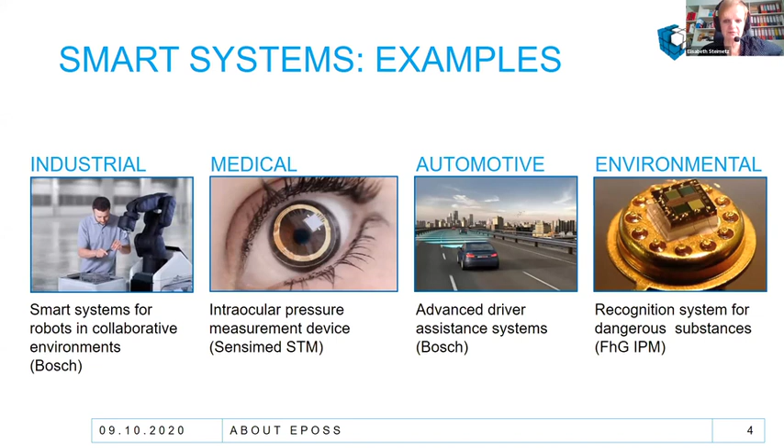I don't think I have to talk about what a smart system is, just to show you some typical examples of EPoSS members here on this slide, coming from industry, industrial applications, medical, automotive, and environment. What's maybe more interesting is what EPoSS can bring to it, and what we are doing there. We try to really connect experts and create common European approaches for research, and from research to production.

Based on that, we are defining research priorities. We are very active in creating roadmaps and SRAs. This year, EPoSS is heading the ECS SRA, the Electronic Components and Systems roadmap. We are involved in the roadmaps of other public-private partnerships for upcoming new Horizon programs like CCAM, like Towards Zero. My colleague Gereon will talk about that in detail a bit later. So we are defining strategic innovation processes and roadmaps, and last but not least, we try to mobilize public and private financial resources to do all this.

Currently, we are involved in Horizon Europe. Of course, we have published papers to position SMEs in this context. We are now integrating with Euripides, the Euripides community, into EPoSS for upcoming Eureka programs, and we are deeply involved in the ECSEL joint undertaking. So the succeeding program will be the Key Digital Technologies public-private partnership, which is currently under preparation and will hopefully start towards the end of 2021.

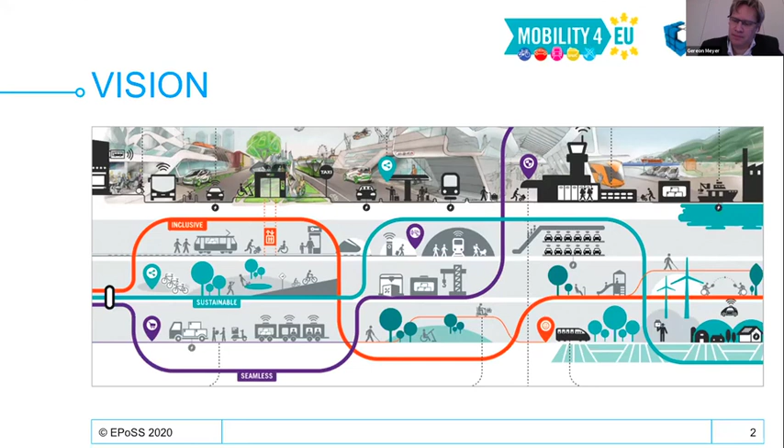In the EPoSS community, we have recognized that smart systems enable the transformation of the mobility system. We've had this vision for a long time, because they are key to enabling green, integrated, interoperable mobility solutions. They facilitate taking into account the human in the approaches, and they support the transformation of transportation as a whole, with technology transfer from auto into other domains.

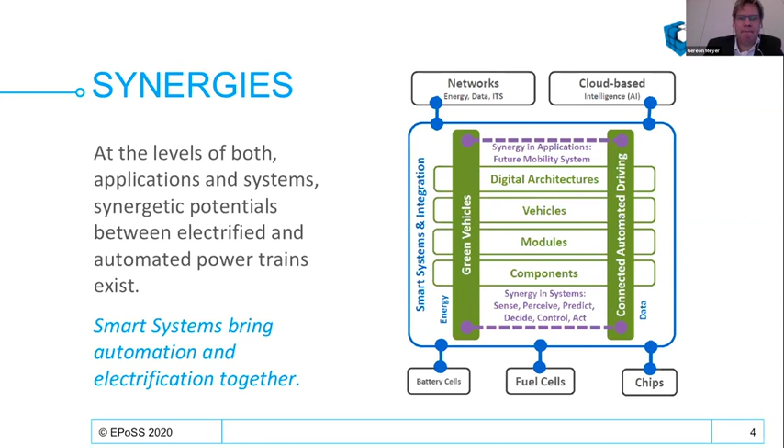Automated driving is a very good example of the role of smart systems as an enabling technology, and also as an enabling technology that can support a paradigm shift. Originally we developed that topic out of advanced driver assistance systems, assuming there are more and more functions that vehicle systems can perceive based on sensing and sensor data fusion. At the latest stage, a driver can, for a short time, take hands off the wheel and eyes off the road, and have the vehicle drive for a while until it comes to a point where it needs human support. But the interesting step is, of course, if you take the driver completely out and make the system self-driving, driverless.

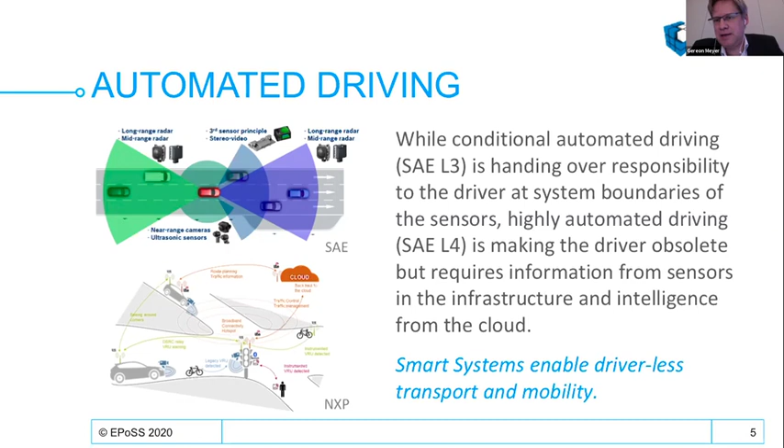For that, there's more than just what the capabilities of a smart system in the vehicle can deliver. It needs embedding into greater data availability and knowledge sets, and this is also the point where artificial intelligence comes in.

Just to show you one example that I find most striking: the situation on the road. You have a person close to a crosswalk and a super intelligent smart car approaching. The question here is not just what the car can perceive and detect, maybe a 3D image, but what this means and what expectation the car system has of that situation. The crucial question is whether that person will cross or will not, because in one case the car needs to stop, and in the other it can continue driving.

Of course, we want to avoid a car stopping all the time if there's just the slightest possibility of somebody maybe approaching the road. Rather, we try to be able to tell in a trustful way what will happen, to understand the intentions of the road user. Here, the capabilities of smart systems themselves are quite limited, and we need additional information. We need to understand patterns. We need to know and take into account a big set of experiences.

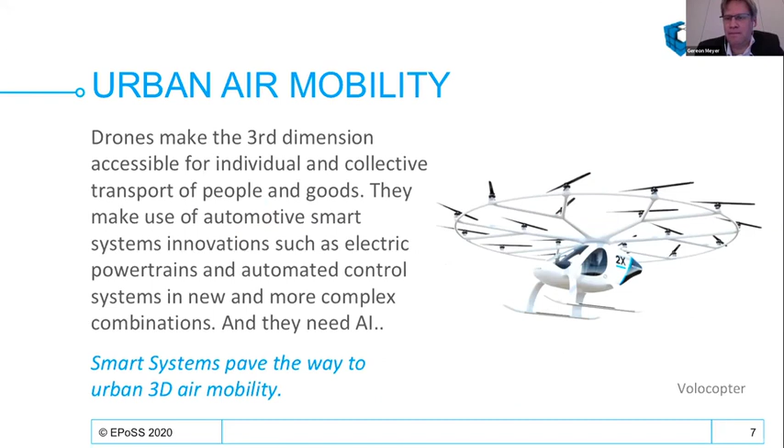Maybe that's also the role of the EPoSS community here: to point to these needs and show where the future directions are. This has been well reflected in a lot of roadmaps and documents published in recent years, whether on the electrification of road transport, on automated driving, but also in our strong support to the European Commission in drafting the Strategic Transport Research and Innovation Agenda, covering the electrification of the transport system, automation and connectivity.

One important aspect is that the EPoSS community and their members, in very few cases, are developing technology you can directly put on the road. We are part of an ecosystem of enablers, in interaction with an ecosystem of applications that needs to understand where the technology pushes are that we can define, and also what technology needs to be pulled according to user expectations from the application domain. That's a very exciting interaction, which the EPoSS community supports through the lighthousemobility.eu of the ECSEL joint undertaking.

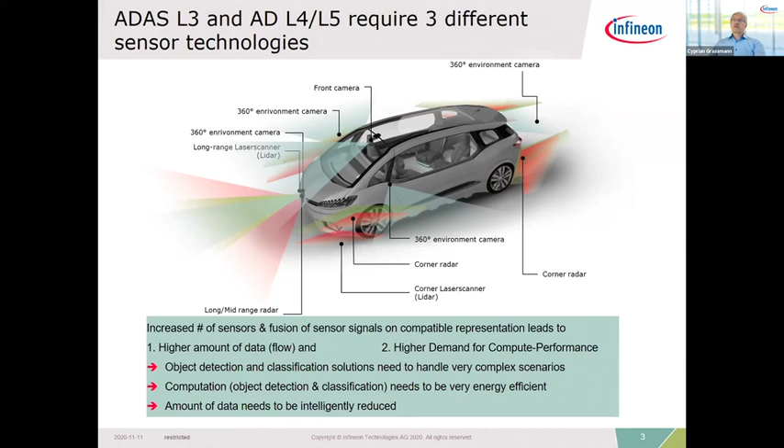And to bother you even more with numbers, I want to dig a little bit deeper now also into the radar aspect, and show you what that means. So if you look at today's radar sensor, which is a so-called FMCW system, frequency modulated continuous wave radar. Here showing a simple example in adaptive cruise control

sensor. When you look at the early versions, you basically have more or less a sensor which is processing all the stuff until the drive command. That means it gives you acceleration, deceleration commands out of the sensed situation, and the objects which are classified, if you have an obstacle or a preceding car which is slower and you have to slow down, or is accelerating and you can accelerate again.

So if we look at such a system, a radar sensor, we just pick a system which you would see deployed in cars today. We're talking about, let's say, a 3 transmitter channel and 4 receiver channel radar device. And when we look at the so-called MMIC, monolithic microwave integrated circuit, you see that with 4 receive channels, we will end up in a max of 400 megabit per second per channel, which ends up to be 1.6 gigabit per second data stream, which is coming out of that one sensor.

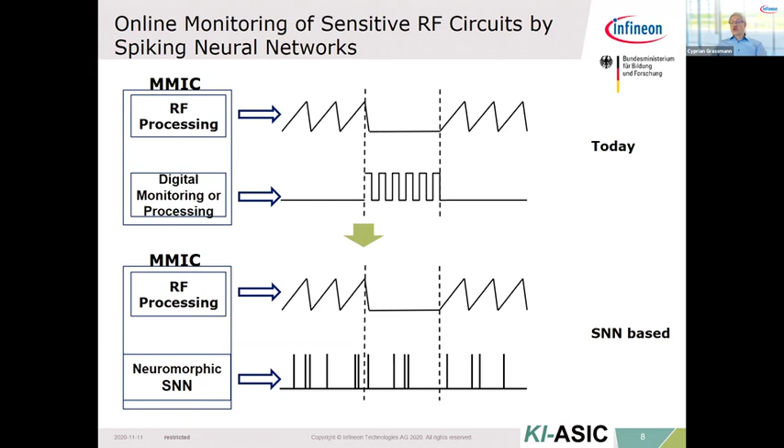Moreover, it's quite important to look at additional benefits which these networks can provide. I said they are asynchronously active, and they have a low activity. So especially radar is one of these solutions where you have sensitive RF circuits, which might be disturbed by this activity of monitoring, especially if you do this digitally. The very standard situation for sensitive circuits today is having digital activity in areas where you usually have no RF activities. With these spiking neural networks, you have the chance to run continuous monitoring of the device without disturbance, or much lower disturbance, leveraging all the benefits of these kinds of networks.

So as a conclusion, I hope I gave a lot of motivation that this AI is not only attractive, but also necessary to deal with these complex autonomous driving challenges, and that neuromorphic solutions, with their promise of lower power consumption and potential lower disturbance of these sensitive systems, are a path to cope with this problem.

We have mainly the challenges ahead. That means we have functional safety requirements to fulfill using artificial intelligence approaches, because this is rather tricky. But on the other hand, we also have the opportunity to use AI especially to fulfill the functional safety requirements, which somehow sounds like making the fox in charge of the hen house, but effectively is an opportunity which probably has to be looked at more closely.

And therefore, it's quite essential to invent SNN solutions for functionally safe AI, to be able to fulfill all these promises which we put out for autonomous driving.

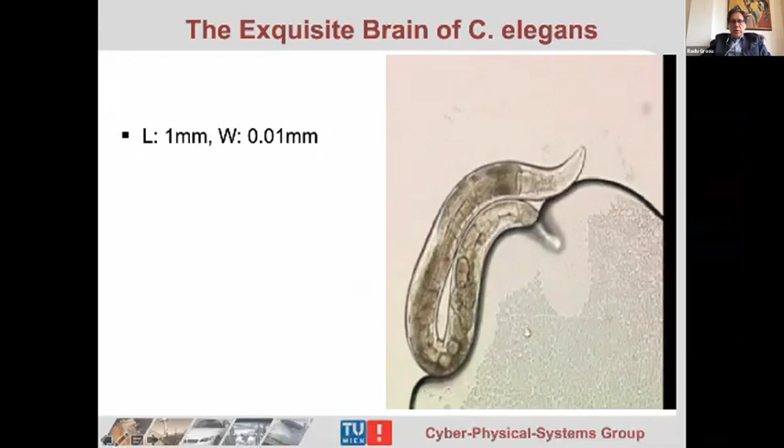Our inspiration comes from C. elegans, a very small worm, less than 1 millimeter in length and 0.01 millimeter in width. Being so small, its 302 neurons can communicate with each other without attenuation, without using spiking. We consider that spiking is a very important implementation issue, like analog to digital conversion. It's very important for implementation, but not from the point of view of learning.

The nematode has around 8,000 synapses and 95 actuators, which are the body wall muscles. Together, they allow amazing associative learning capabilities and social behavior capabilities for this small C. elegans nematode.

Like any cell in the body of every organism, a cell has a membrane, and the membrane is fat, so as a consequence it's an insulator. There is a concentration of ions outside the cell and a concentration of ions inside the cell, and the difference in concentration of these ions defines a membrane potential, V. For example, cell i has a membrane potential Vi. Since this is an insulator, it acts as a capacitor, so you can write the capacitor equation for the membrane of the neuron, where the rate of change of the membrane potential is the sum of its currents.

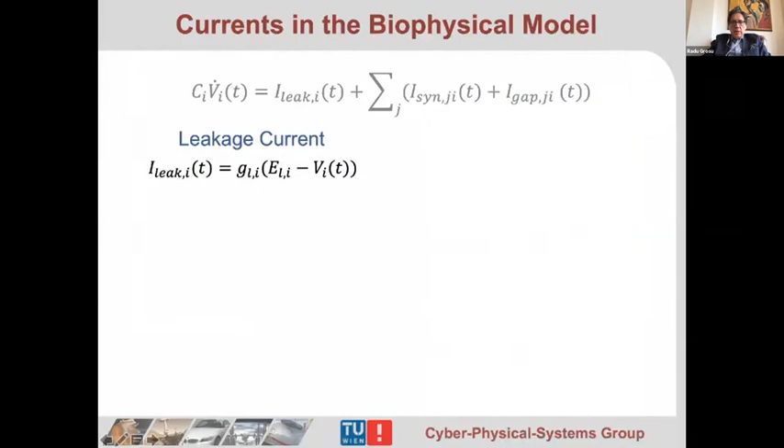The leakage current is essentially a proportional controller, where the error is the difference of potential between the resting potential and the membrane potential, and the proportionality constant is the conductance. Then there is a gap junction current, which is also a proportional controller, where the error is the difference of potential between the two neurons, and the proportionality constant is the conductance between the two neurons. It's just a small channel that allows the exchange of ions.

But the most important ones are the chemical synapses, because this is where learning happens. So how does this happen?

So you have these bubbles filled with neurotransmitters that come through the axon to the synapse. There they bind to the synapse and they open and release neurotransmitters. And these neurotransmitters then go and bind to the receptors of these channels that you see here, and when they bind to the channels, they open them.

Now you can write a very complicated differential equation about what is going on here, but this is simplified by assuming that there is a maximum conductance, g_s,ji, and then there is a presynaptic potential based conductance. It varies with the presynaptic membrane potential, and this conductance has to be multiplied with the difference of potential such that you get a current.

If the difference of potential is positive, then ions flow inside, so the synapse is activating. And if the difference of potential is negative, then this expresses the fact that ions are flowing outside, like this chloride ion, which is negative, it flows outside, and as a consequence, the synapse is inhibiting.

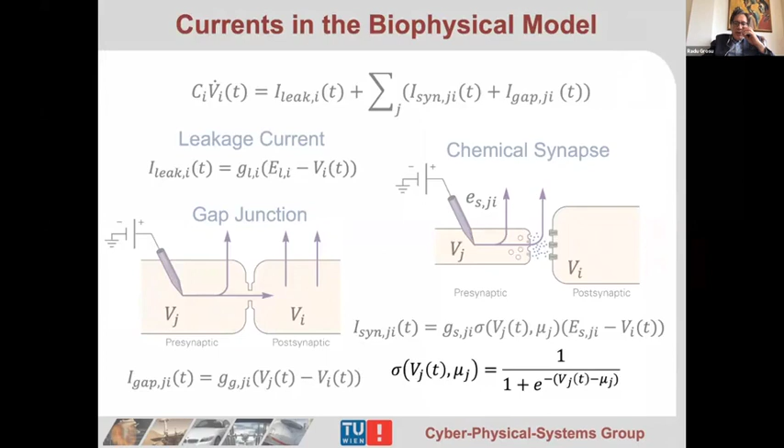Now what can you do with this? You can have various motifs, like activation, inhibition, as I was telling you. You can have a coupling when you have a gap junction between the two neurons. And the more interesting ones correspond to feedback connections, connections like sequencing, where you have activation and inhibition.

Sequencing means X goes first and then Y goes. Conservation means they behave essentially the same way, which is also a way of implementing fault tolerance. And then you have mutual exclusion, or selection, so you see when X goes high, Y goes low.

So what can you do with this kind of primitives? Let me give you an example. Suppose you have an expression, theta greater than X. In compilers, you might have learned that you create an abstract syntax tree for it, where you have theta and X as inputs, and then you have a comparator that says greater than. Now how can you implement this with neurons?

First, you can say theta and X are sensory neurons. Then you have an interneuron which does the comparison, and then you want to do something with it. So you take, for example, the sequencing primitive: the first neuron activates the second, and that second inhibits the first. This means the first neuron is active, and the second neuron becomes active when theta is greater than X, when this neuron, so to say, is high. This can implement a while loop, and within this while loop, you can have activation of a motor neuron, which says go back.

The networks are much smaller than the state of the art. By the way, this is driving in Boston. The networks are highly robust to environmental perturbations.

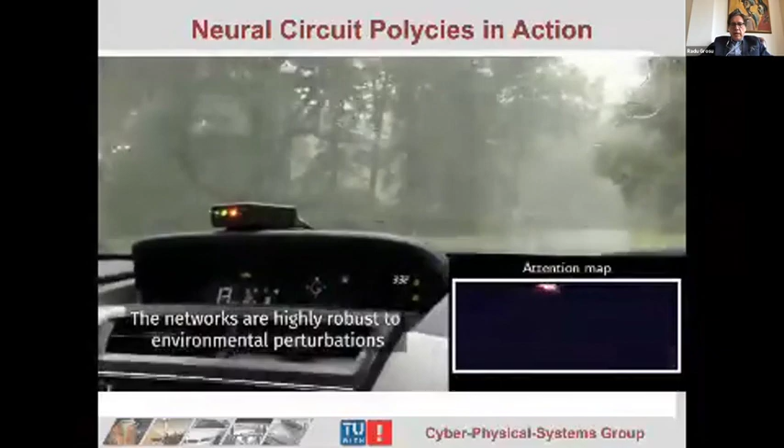Here you see the input actually gets distorted by the rain, and you can see the attention map stays focused even if the input is noisy. By the way, this is my PhD student, Mathias Lechner, driving in the streets of Boston, actually outside of Boston.

So these circuits are called neural circuit policies. These are a new generation of deep models that enable visualization. They are more robust and auditable.

This is joint work with IST Austria and with MIT, and was published in Nature Machine Intelligence. But it was not only published in Nature Machine Intelligence, it also made it on the cover of Nature, which was for us very nice.

Some of the challenges at the edge could come within the selection of sensors. If I take localization as an example, which is a method and process of understanding where it is locally and globally, different sensors have different levels of trade-off between cost, computational complexity, and the accuracy they're able to achieve. There's also underlying advantages and limitations with each kind of sensor.

For example, take a camera: while it is able to provide rich information, it could be limited by lighting conditions, situations such as motion blur, or textureless areas that could have a detrimental impact on performance. So in essence, it's really about the trade-offs between the cost of sensors and performance when trying to use AI-based perception for a specific application.

In terms of computational cost, we talk about using sensor fusion that utilizes multiple sensors and their respective strengths and advantages for more robust performance. But that would really mean even more data. With a multimodal sensor fusion approach, it could easily produce terabytes of data each hour.

Next, I would like to talk about some of our collaborations with customers and partners and how we deploy those embedded intelligence for applications. In particular, we've been working with Siemens on a digital twin solution for autonomous driving, where the solution is mainly used for validation and verification.

We have worked with Siemens on providing our 3D reconstruction algorithms in order to demonstrate an autonomous emergency braking function as a starting point in a closed loop digital twin, where a vehicle has been simulated on a physics level, ranging from the ECU to steering system, braking system, as well as simulation from different sensor modes, including camera, radar, etc.

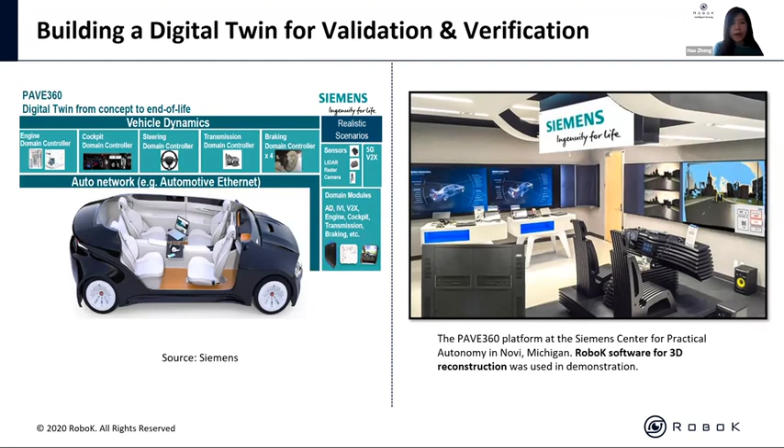We've also presented this work with Siemens and ARM on a partnership announced at CES at the start of this year, where we provide the 3D reconstruction and detection algorithms running on ARM-based architecture, able to generate critical depth information in real time that triggers an autonomous emergency braking function. This has been demonstrated as part of a digital cockpit demo.

Through this collaboration, we've also written articles on how we together built this 3D perception system, which could have significant benefits in terms of the memory and processing footprint required.

Some of the other collaborations we've had include passenger and commercial vehicles for both production programs looking at testing and validating the technology itself, and also in the retrofit space, utilizing existing sensors specifically on commercial vehicles. The benefit of the solution is it provides scalable and modular perception modules for customers to choose and arrange their architecture.

And here are some demonstrations of the 2D and 3D perception on urban roads, running on embedded systems, in different geographic locations.

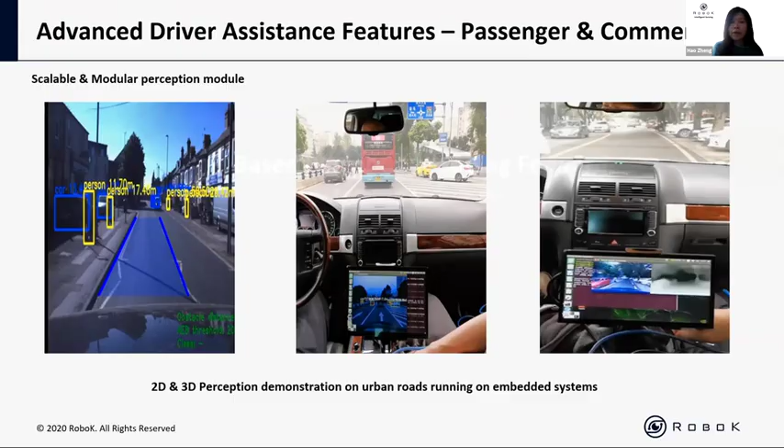So in overall AI-based perception at the edge, we believe that the trade-off continues and there's still additional opportunities with the technology itself. The biggest trade-off with running AI at the edge, I believe, is also about cost efficiency versus robust perception.

We adopt a modular approach to autonomous driving, with perception being a critical and fundamental step for autonomous driving. But this is not where it stops. In order to actually plan a path reliably, you need perception to know where it is and act around both dynamic and static agents in the environment, but also about how you plan according to the situation, as well as taking a human-centered approach to being able to actually gain trust from humans on board.

There's also the efficiency of each software component and the cost of each component for both sensors and compute. And all of this can affect the viability and feasibility of autonomous vehicles for the application that's able to apply the technology to. Regarding deep learning, it has inevitably increased the computational complexity, which could actually render some of the applications cost prohibitive.

But there's optimization that could be applied that's able to maintain the level of performance of a much more complex model, while still being able to implement it in a real-time setting through the optimization method.

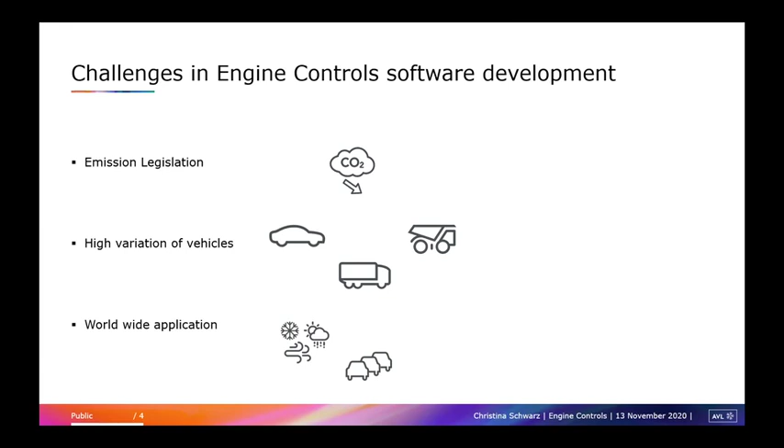These challenges lead to a very complex software structure and an extremely high calibration effort, which is very cost intensive. This is why in the past 25 years, software and controls have changed completely and have gained huge prominence. The complexity of the functions in engine control units has increased immensely, while on the other hand, the vehicle development time has decreased. Also in the future, it is not expected for the software complexity to decrease, especially if we consider changes in user behavior and steady advances towards the market adoption of autonomous driving or connected vehicles.

With the usage of artificial intelligence, we can increase the calibration efficiency, which translates to a considerable cost reduction. Furthermore, we can apply the machine learning models to several different vehicle types, which enables software portability between a wide range of vehicles. And finally, by employing data intelligence, there is potential to achieve huge improvements in terms of model training, as more environmental and operational information from various global locations can be exploited for model training.

Now let's consider the air path control. AVL's experience with air path controls started almost 20 years ago.

In 2005, we were able to build the first testbed demonstrator using our software. The results were validated in a vehicle later on, and several SOP projects followed, where we extended and improved our control algorithms year by year.

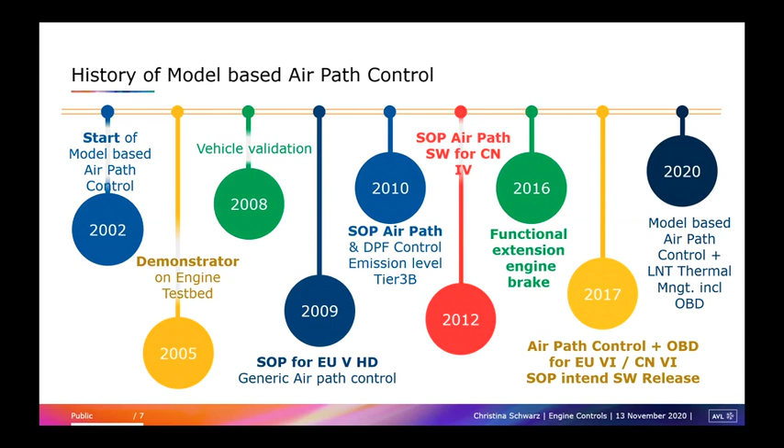To get an overview of the air path, I'm going to touch upon the main components and their influences. There are two key variables that the air path control relies on: the lambda, which is the air-to-fuel ratio, and the intake manifold boost pressure. The lambda is controlled via the exhaust gas recirculation valve, also called EGR valve, and the intake throttle. And the intake pressure is controlled via the turbocharger.

Now, the problem is that the actuators have a strong influence on the sensor values. This is indicated with the blue arrows in the figure. The trade-off between performance and robustness is conflicting crosswise in the coupled MIMO system.

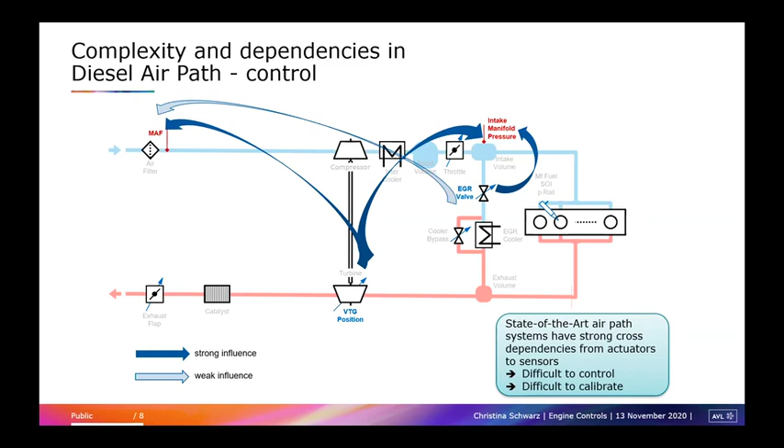By replacing the standard controllers with a data-driven model, it is possible to achieve improvements in model accuracy as more environmental conditions are considered for the model training. Furthermore, the usage of these data-driven models significantly reduces the calibration effort and therefore leads to a cost reduction. Additionally, we could use the data-driven model to detect an air mass drift for a lambda adaptation.

As the inputs to the data-driven models change rapidly, a high flow of information is required, and the execution of the AI algorithm on the edge is indispensable.

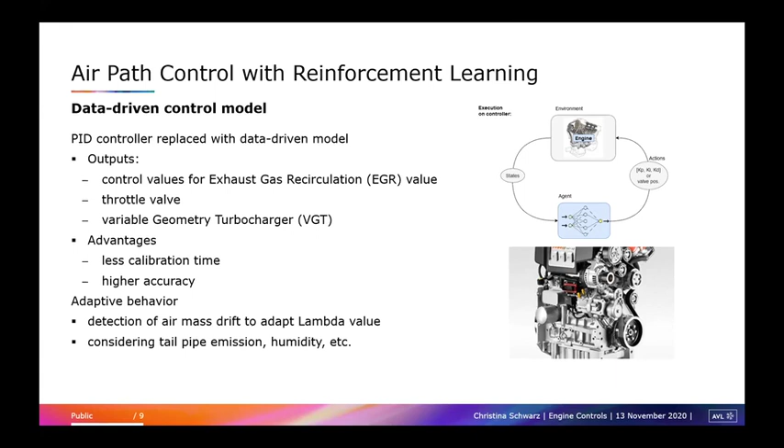The second application, which I am presenting today, is the data-driven temperature control of the diesel oxidation catalyst to burn the soot in a diesel particulate filter.

Here on this slide, on the top left, you can see a state-of-the-art after-treatment system for Euro 6 applications. Euro 6 is the current emission legislation standard. The system consists of a diesel oxidation catalyst, also known as DOC, the diesel particulate filter, DPF, and the NOx reduction device, selective catalytic reduction catalyst, called SCR.

The diesel particulate filter is used in a wide range of applications to filter out particulate matter such as soot and ash from the system. When a filter gets full, or for control engineering, when the accumulated soot reaches a critical point, an active regeneration is triggered to burn the soot.

To do so, temperatures of up to 600 degrees Celsius are necessary. In normal operation, such high temperatures are not generated by the combustion engine. Therefore, the fuel is oxidized, so burned, in the diesel oxidation catalyst in order to heat up the system.

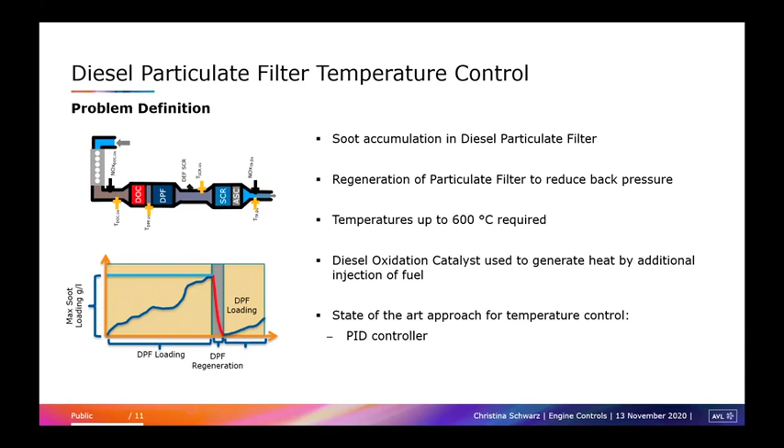The amount of fuel which is needed for the temperature increase is calculated normally with a closed loop controller, whereas the dead time is a specific challenge.

Our strategy is based on replacing the standard controller with a data-driven model to reduce calibration efforts and therefore again drive down the costs during the vehicle development phase.

Furthermore, the data-driven approach enables the inclusion of wider operating conditions for improved adaptability to different ambient conditions. This is especially important when considering the aging behavior of components.

Again, the relevant input signals to the data-driven model can be very transient and need to be updated in real time. This is why, also for this use case, the computation on the edge is essential.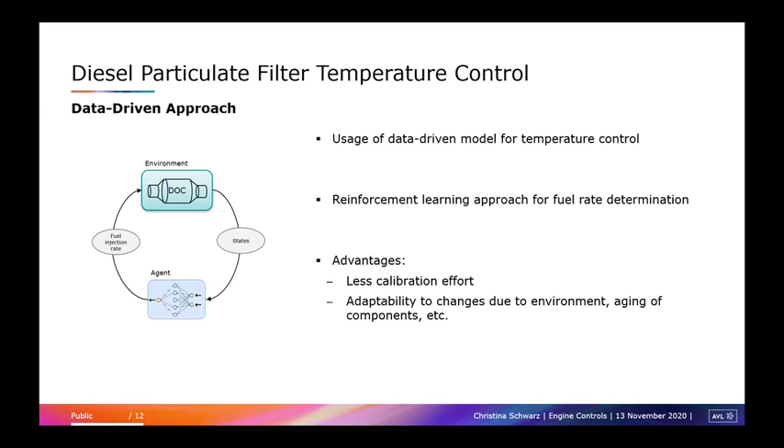After explaining some of our use cases, I will now sum up the advantages of using AI-based algorithms, but also highlight some drawbacks.

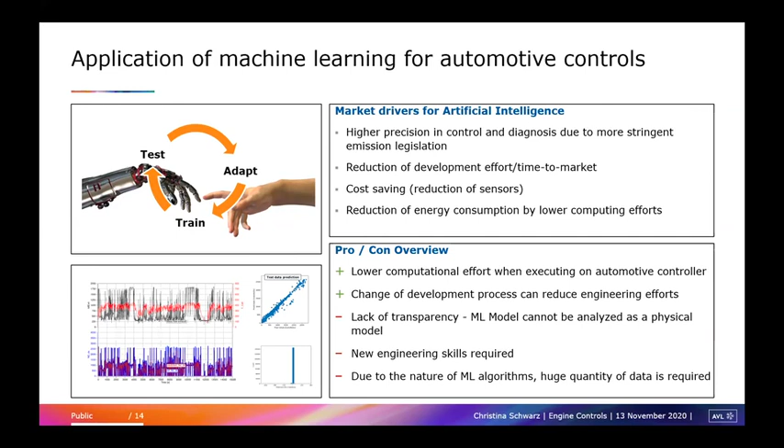Thank you very much, that's very interesting, and I think brings us back to the fact that the car has many systems in addition to self-driving. What I'm going to do now is ask the presenters to put the videos on, and we'll go into the panel session. We have had a couple of questions posed, but by all means, any of the delegates use the Q&A window to pose additional questions.

Let me start with one of the last questions posed, which was, Christina, you mentioned new engineering skills, and I guess that's applicable to all the areas. What sort of things are we looking at? Christina, do you want to pick up on that?

Yes, so especially in engine controls, we are used to just use MATLAB Simulink and normal programming for these engine control units. And here our technical field is not yet very used to these neural networks and AI algorithms for really the engine control, like throttle valves and so on.